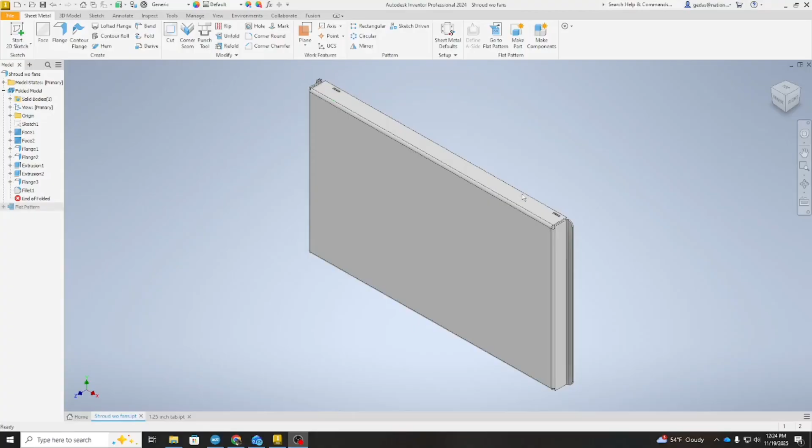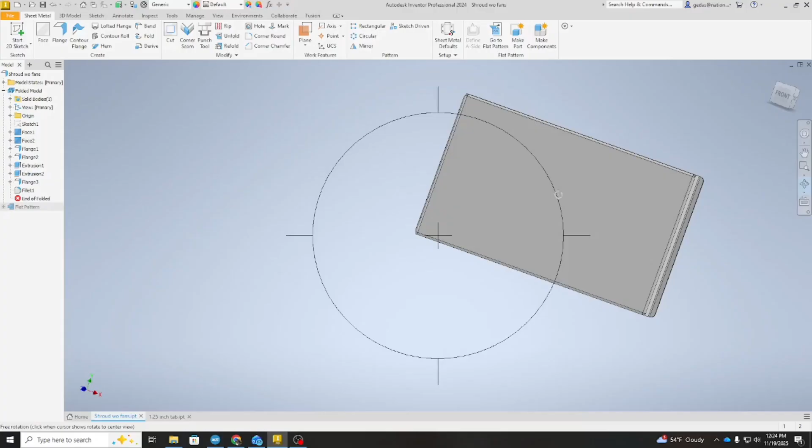If you have the eBay quad-core radiator that I'll provide the link to on my website in the video description, and you're looking for a radiator shroud for it, I've drawn this up for my purposes, and maybe it'd be helpful for you guys. There's a top and bottom. These side flanges are where it'll mount to the radiator, as well as these tabs here on the top and bottom of the shroud for mounting to the existing bolt holes that came on my eBay special.

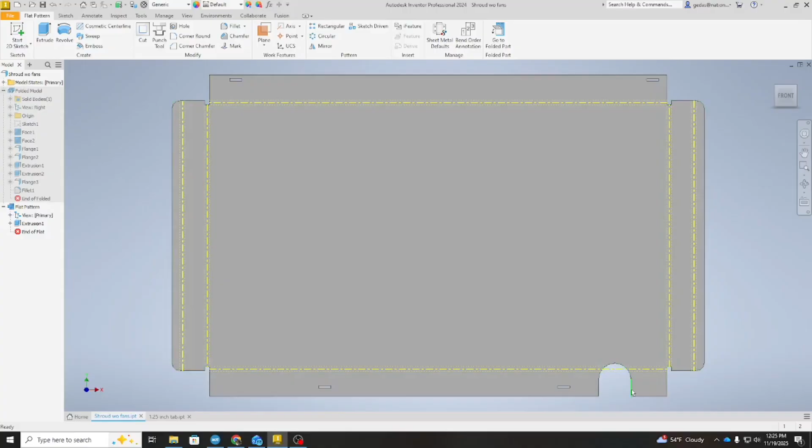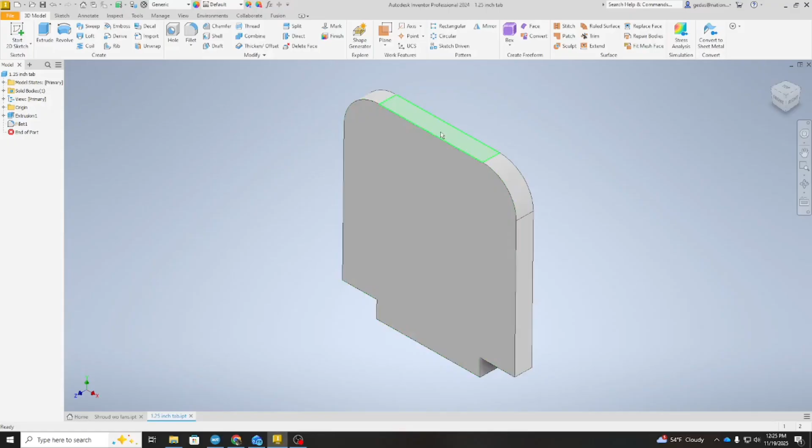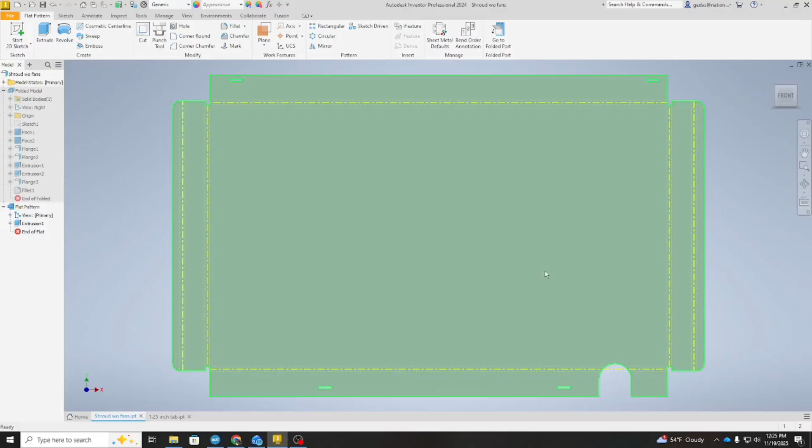You get a flat pattern. It's got a cutout here for relief for the radiator inlet hose. These are just files you could send off to Send Cut Send, and they would bend them up for you, or just use a local fab shop. You can weld up the corners if you want. The tabs I left without any holes in them, so there's two different type tabs - one is an inch tall, the other one's a 1 1/4 inch tall. You can weld these in and drill them out, because I'm sure there's some variation in these radiators and where their mounting locations are - I'm not sure they're exactly perfect. So if you're interested in getting the free plans for this, let me know. I'll also upload another version with the holes cut out for my Spal fan setup. I'm using a 16-inch and a 14-inch Spal radiator fan, and I'll provide the links for that as well.

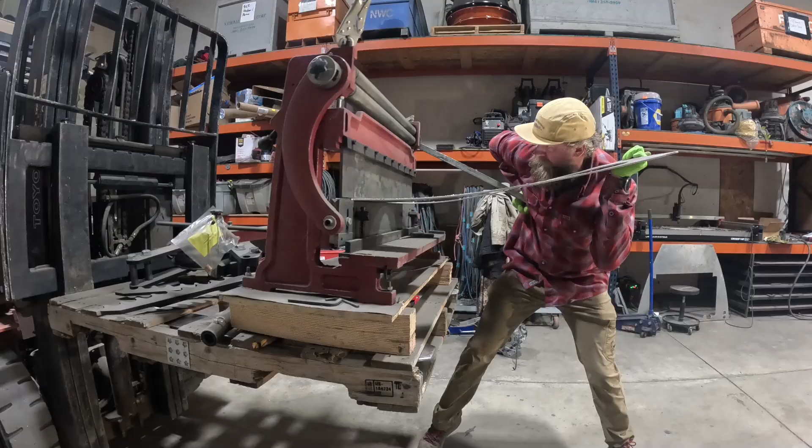Unfortunately, my little Harbor Freight brake didn't have the oomph to go ahead and make up these bends, and I'm too cheap and don't have enough time to send this off to the laser shop, so I just got some relief bends on the bend lines and bent them up on my vise, and I think it's looking pretty good. It fits pretty nice. There's a little relief here for the inlet hose.

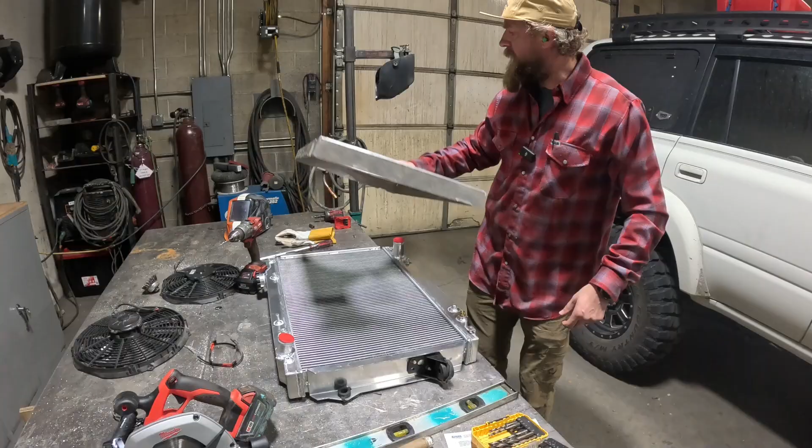Unfortunately with this relief, I'm going to have to weld this whole thing up, and then while I've got the TIG welder out, I'm going to throw in some of these AN-6 fittings.

Right now, this is for the preheat for the transmission cooler, or the transmission fluid. When you start up, your transmission first runs the fluid through the bottom of the radiator and gets it warmed up, then it funnels it through the transmission cooler and back to the transmission. I know it seems ironic that one's warming it up and one's cooling it down, but this gets it up to temperature, and then the cooler makes sure it's not exceeding temperature - that's how I understood it.

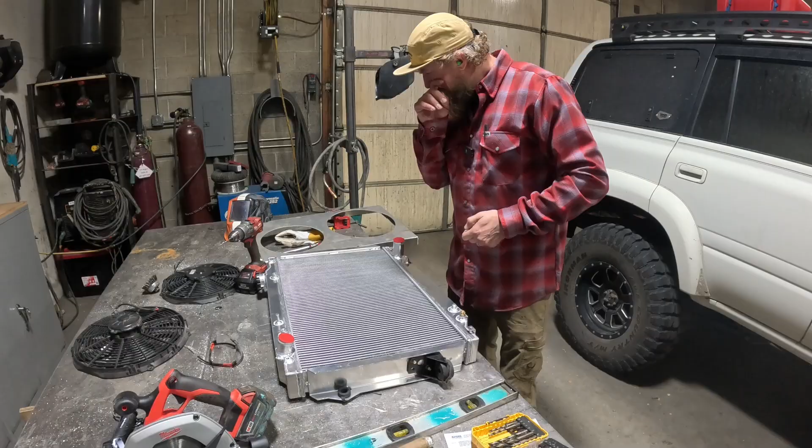So I've got to cut these old fittings off. These are usually just manufacturer specific, with a little fitting that comes out and you use a hose clamp on it, but I don't want any leaks, and everything else on the rig is AN fittings, so we're going to cut these off and weld these little AN bungs in, and we'll go from there.

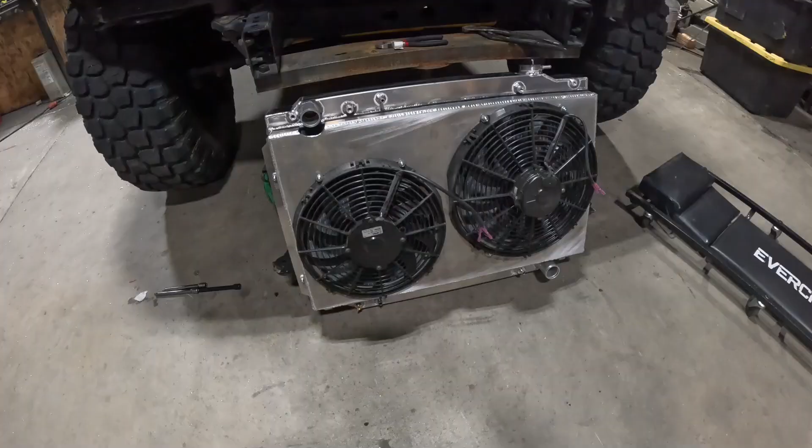Well, that's that, she's in there. Couple of clearance issues here and there, but nothing too major. It's a pretty tight fit, quite a bit thicker than the factory radiator, but she's ready to go. So all I've got to do is put coolant in it and I can start her up. But I'm still working on putting the transmission and the transfer case in, so I can't do that right now.

But I would highly recommend getting one of these - this is just a bleeder kit for the coolant system, and it's got a whole bunch of different adapters in here that swap out for whatever your filler cap is, and it's got a little plunger, so you can fill this thing with coolant after you've topped off the radiator. Start the engine up, let it warm up, and you'll be surprised how many air bubbles come out of this thing and out of your cooling system. So make sure you get that bled out.